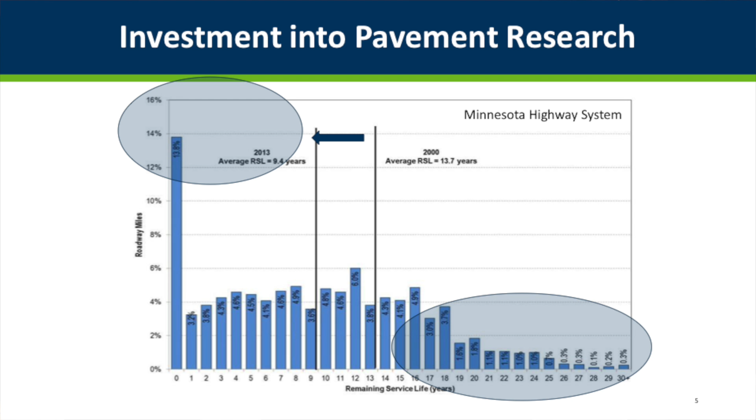But you can see how things changed over the years. We have different issues going on in our state. We fund different things. We may not maintain our roads. We may not, quote, paint the house as well as we should. But you can see in the 13 years since then, we've gone down to 9.4 years of remaining service life. So we've lost about 5 years, and we lost that tail at the end. We don't have as much of a balanced approach.

So when we start spending money on rehabilitation, we're not going to be able to put the money towards it because there's just not the funding to catch up. So it's very important, I think, the recycling we'll be talking about the next couple of days and the work we do at MnROAD, to look at rehabilitation and how we can do that the best we can.

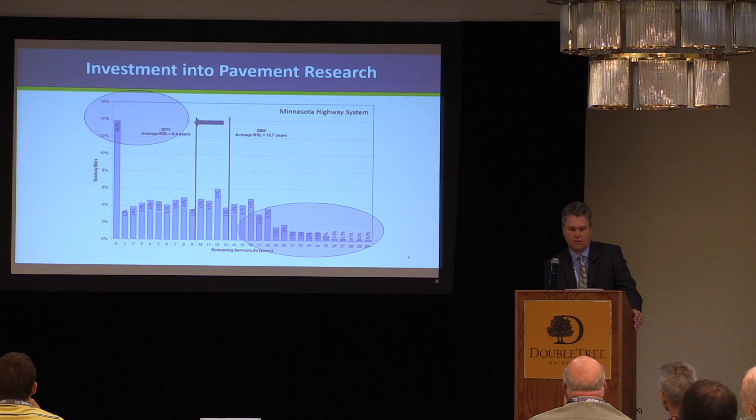A little background on MnROAD. Who has been out at MnROAD? Cool, there's not many people. So it'd be great to have you out there.

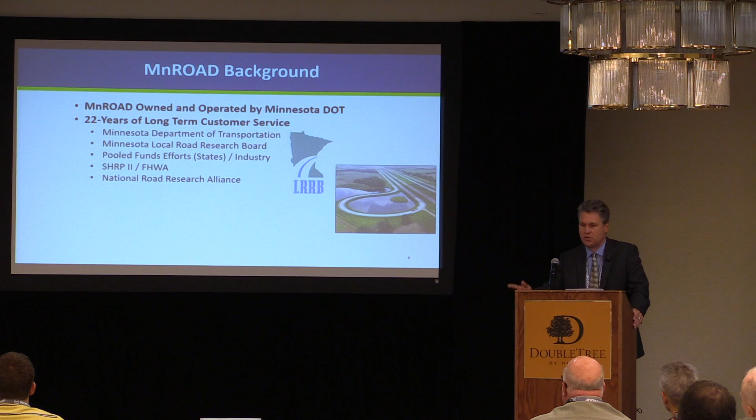We've been in operation for 22 years now. The Minnesota Department of Transportation leads the MnROAD facility. They've owned and operated it with their partners, the Local Road Research Board. Minnesota has a group that puts money towards research from the locals, the cities and counties. They get half of 1%, and they've been supporting MnROAD over the last 22 years. We also work with pooled funds with states. That's how we work with NCAT, SHRP2, FHWA. And right now we're working on the National Road Research Alliance.

We have both concrete and asphalt. We're in a cold environment and work with new and rehabilitated pavements. We've gone through 3 different phases. The initial experiments from 94 to 2006 did a lot of structural designs. We found that our concretes are thicker than they need to be, and that the environment causes more damage on our asphalt roads. Phase 2, we went through a number of different experiments and pooled fund studies for 10 years. And now we're heading into our 3rd phase that I'll be talking about later.

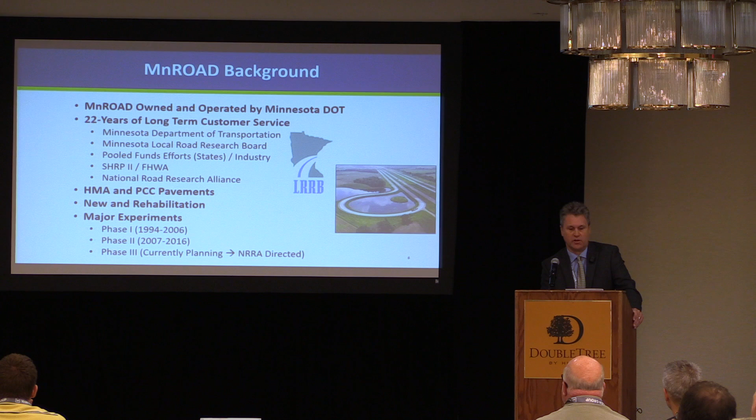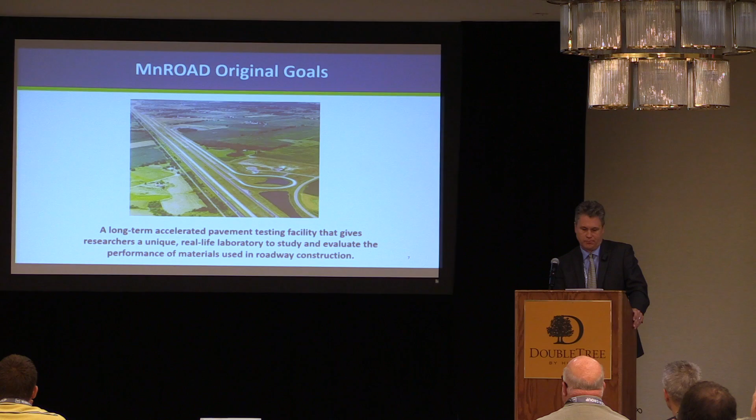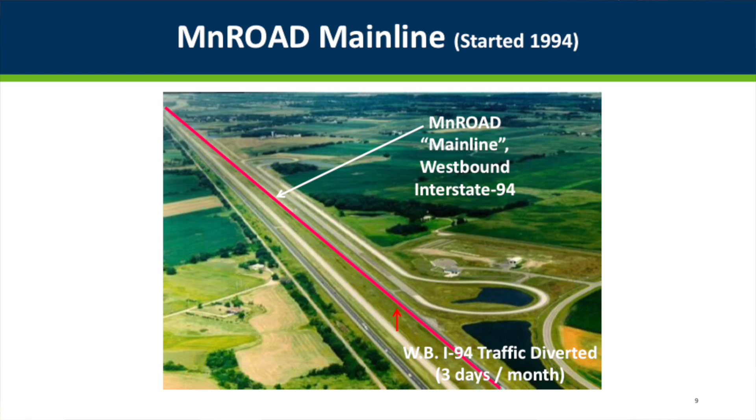For those not familiar with MnROAD, it's a test facility, a real-life experiment with real-life equipment, materials, and traffic. We have existing I-94, 2 lanes built in 1973. We built our main line next to that, where we divert traffic from the old westbound onto the I-94 main line. We move traffic off 3 days a month so we can go out and do monitoring. We can divert the traffic back and forth and have test sections on that main line.

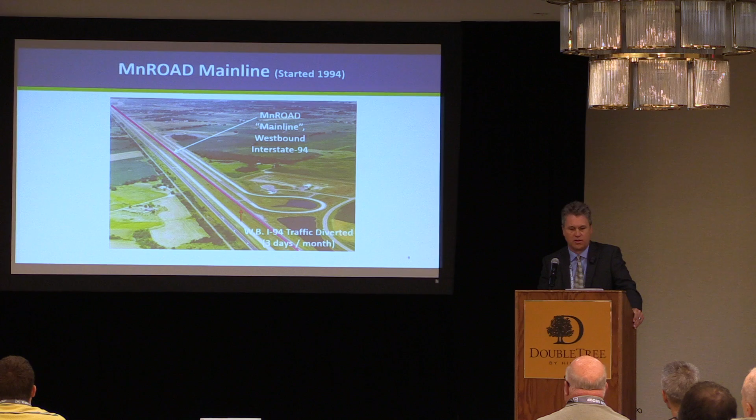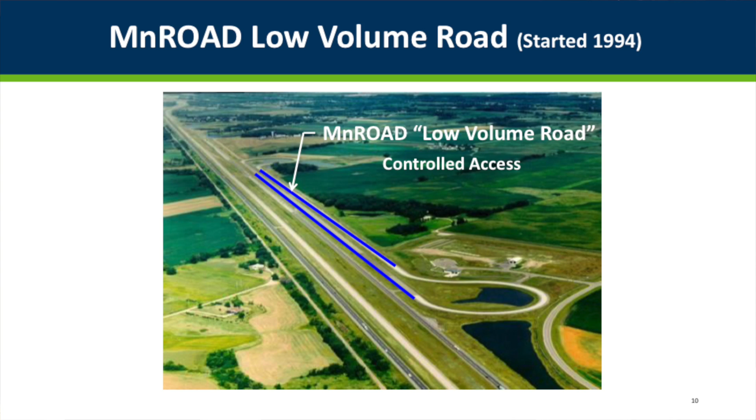We also have test sections on our old westbound. We have a low-volume road, brought to you by the Local Road Research Board. We do lots of national research even on our local system; a lot of the issues are the same. This is where we have controlled traffic, and we drive a truck around 60 laps a day on the inside lane, looking at the damage. It's to simulate a low-volume road, thinner designs, different conditions for the locals and their needs.

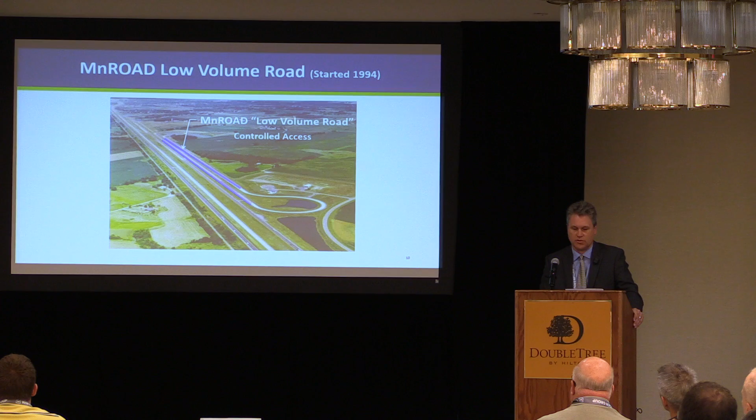And we're also building test sections. We started building test sections on the old westbound, the original westbound. We're doing some different things out there, and I'll talk about that a little bit later.

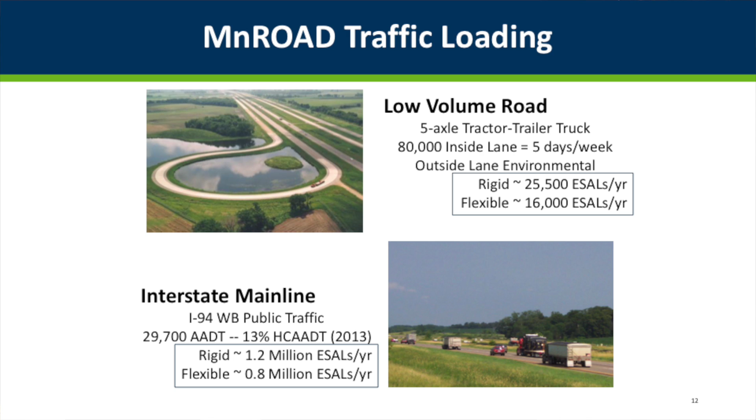So the traffic, again, looking at the low volume road, this is where I praise Doug, the truck driver. Doug drives around the track 60 laps a day. Doug says it's better than farming. Those who've heard me talk, I've said that joke too many times. But Doug drives around the circles. He provides the loadings. That's how we get our traffic.

And you see the ESALs there for rigid and flexible ESALs. The outside lane, again, is environmental, where we're not trafficking, looking at what the environment causes for damage versus truck and the environment. We also have the interstate main line. This is a very heavy trafficked road. Probably get about 13% trucks out there with a high ADT.

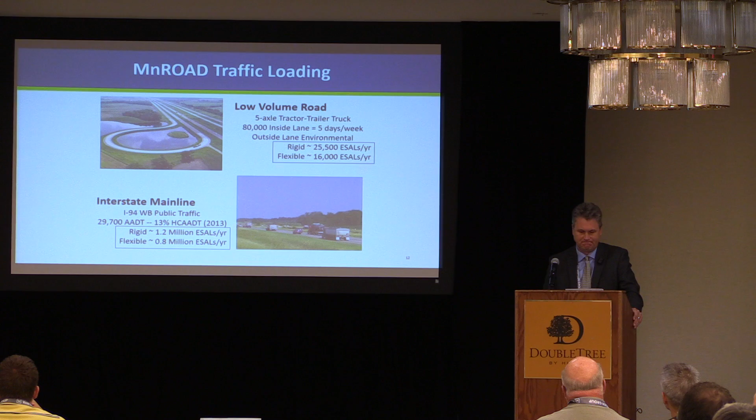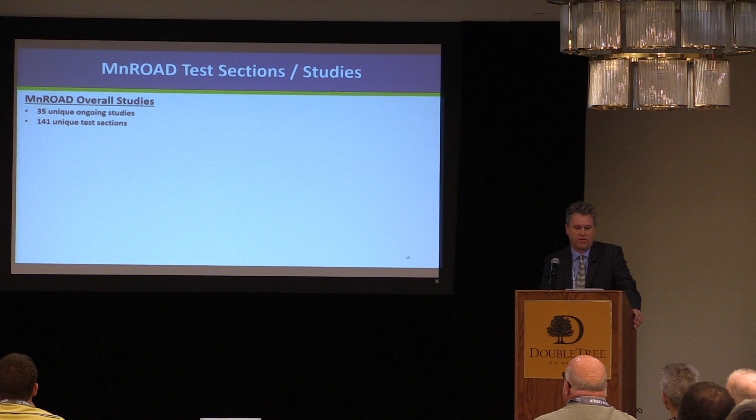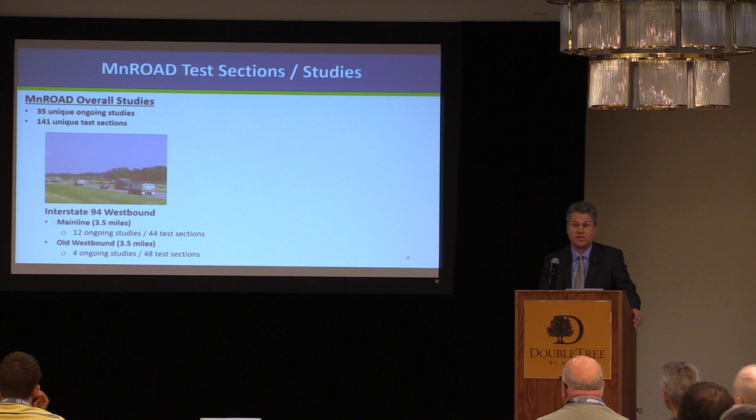So when you look at all the studies that are going on, it's quite a maze of studies, I guess. We have 35 unique ongoing studies out there right now. We have 141 unique test cells. Of that, the interstate, again, we have 12 ongoing studies out there, 44 test sections in our 3.5 miles. The old westbound 3.5 miles, we have 4 ongoing studies that we started up in 2010 and about 48 test sections. Then the low volume road itself, again, the Local Road Research Board sponsors that along with cities and counties, 19 studies and 49 test sections.

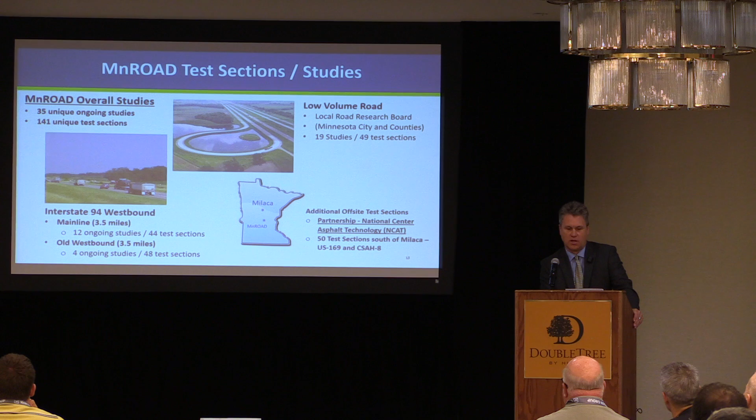So we've also added test sections off-site. This is with NCAT, and we'll be hearing more about that from Buzz and possibly Jerry later on today, but kind of the partnership with NCAT. We have test sections off the track, but now we have a pavement management van that we can collect data on and take care of the operations. So we can track the performance of those test sections. So we have a lot of different things going on, a lot of things to track, a lot of good things that we're doing with our group.

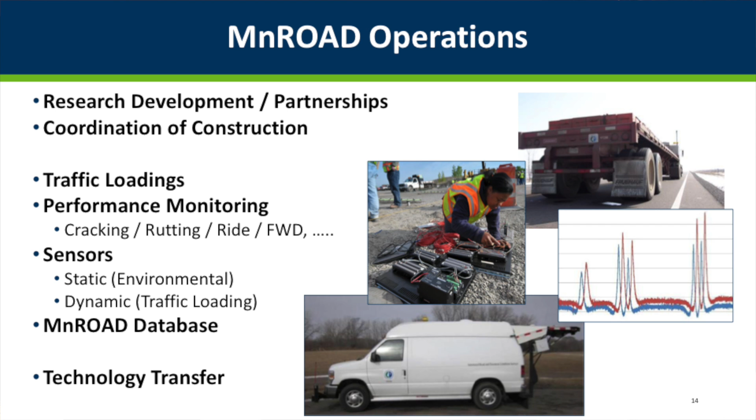Our operations, again, we work on the partnerships and the research development, working with people like you on what's the next study that's needed, coordination of construction. But we've also been monitoring the traffic, the loadings, the performance monitoring, cracking, rutting, ride. Sensors, we have environmental and dynamic sensors, and the database. And this all kind of goes into developing the background for each study and gives it the basis that it needs to be successful. We also do technology transfer and getting the word out.

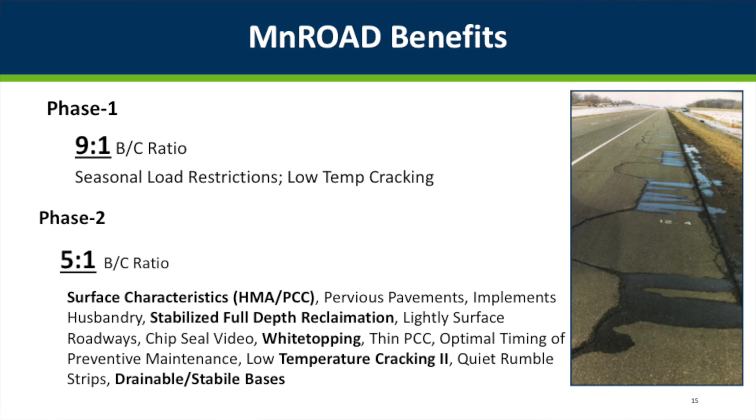Some of the benefits that we've seen over the years of the first phase, we had about a 9-to-1 benefit to cost. We have a paper out on this. We did a lot of different things on spring load restrictions, low temperature cracking, things like that. We also, in phase 2, in the last 10 years, saw a 5-to-1 ratio. Now, you can see all different studies there we've worked with, but there's a lot of benefits to doing things on a small scale before we build on a large scale throughout the state.

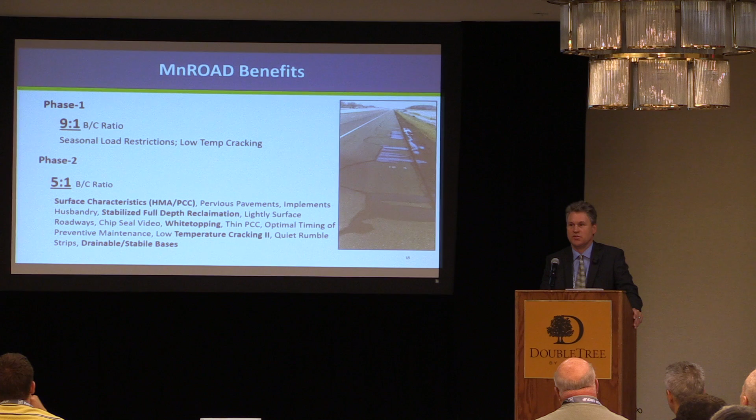MnROAD's been used for not only showing how something can work and building further beyond that, but also just the idea of building something that people see, kind of as a demonstration project that they then can build for themselves. For example, we had two types of concrete sections, not that you guys are big concrete fans, but the idea here is that we originally built 9.5-inch concrete and 7.5-inch concrete. They both perform the same. So building a 7.5-inch is working out just fine for us in reducing the thickness of our concrete. That kind of gave people confidence that yes, you can build something thinner, and yes, you can save money on materials and things like that.

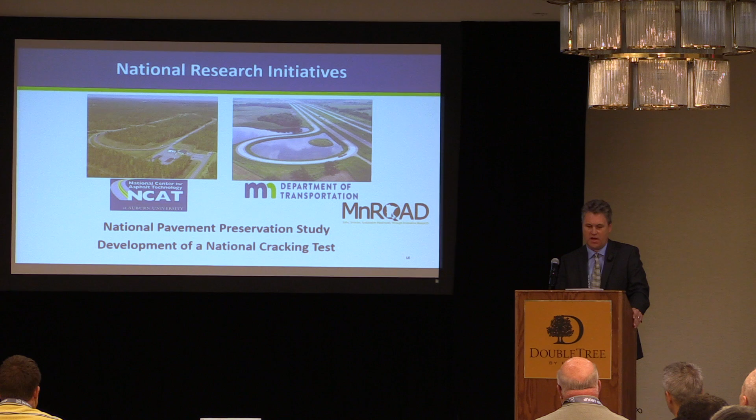Talking a little bit about our national research initiatives, we've been working with NCAT on 2 studies. One study had to do with pavement preservation. Another had to do with developing a national cracking test for HMA pavements. We got a number of different groups in this, states that are involved, industry that's involved. Through this partnership we developed the pavement preservation study, with NCAT being in the south, hot, warm, non-freeze, and MnROAD north, cold, freeze.

We had high and low volume test sections, but again, this partnership helped us develop national studies with climatic zones, having consistent ways of collecting data and producing results, and quantifying the life-extending benefits of pavement preservation. That's kind of the study that we're working on with the Milaca test sections, Lee Road test sections down in Alabama, along with US 280.

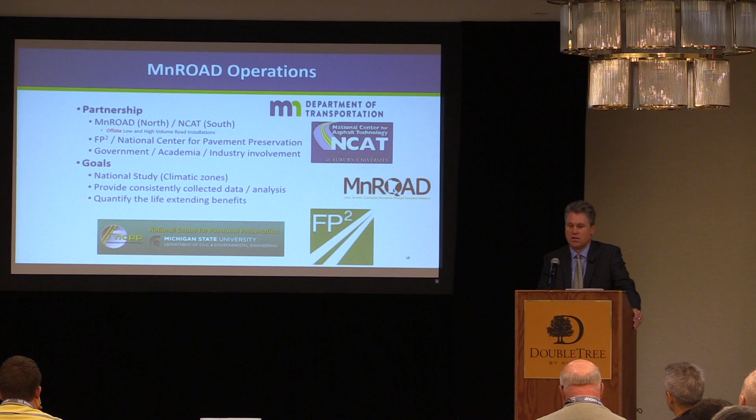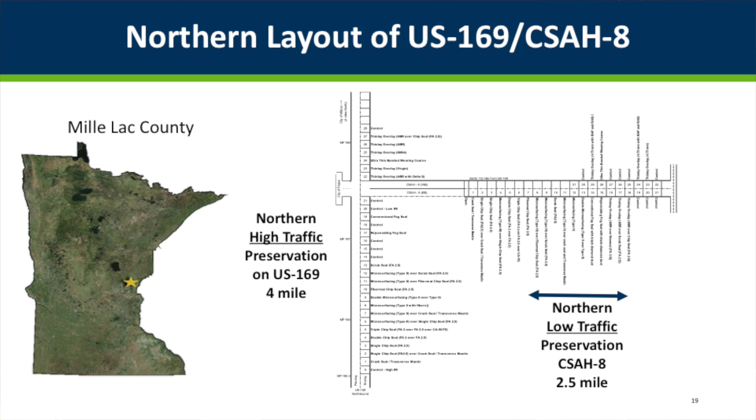So we've developed these test sections with the same contractor, building the same test sections. We have a number of test sections. This kind of shows a map of up near Milaca, which is about an hour north of here, looking at our high volume preservation: chip seals, cape seals, microsurfacing, thin overlays, different treatments. Same with the low volume road with CSAH 8.

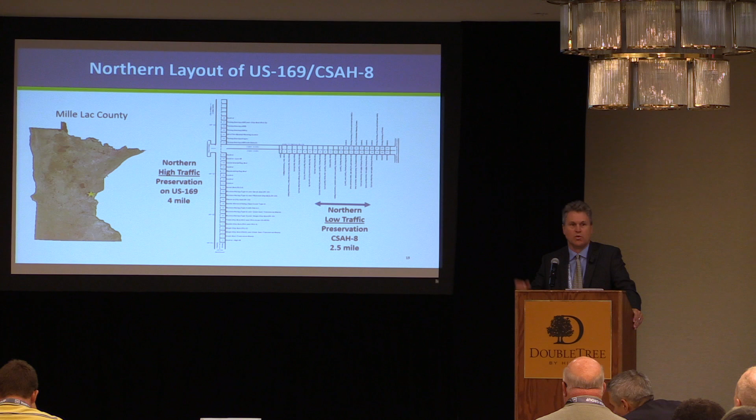The idea here is we built the same test sections on different volumes of roads. We built the same test sections down at NCAT. They built them a year before us, but the same contractor built them. So a lot of consistency here to come up with different studies that will not only help out Minnesota and Alabama, but will help out states in between. And that's how we're working towards the national goals.

And then we looked at performance tests. This is developing different criteria for mixes before you place them on the cracking potential of those mixes. You've heard about balanced mix designs and things like that. I think there's a talk later on today.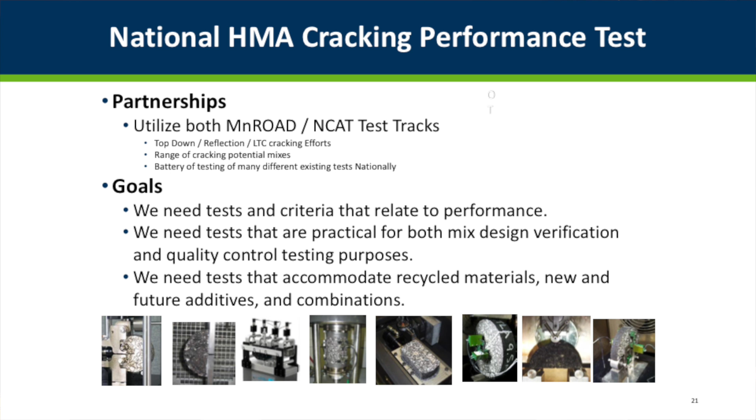But NCAT and MnROAD have been working with that on the HMA performance test, looking at the different tests utilizing the NCAT test track along with the MnROAD test track, and looking at all these different types of goals that we have for performance tests to come up with a test that nationally can be used to predict performance. And again, you need something that's going to correlate to performance. We built test sections related to that, do a number of different tests, and move forward with that.

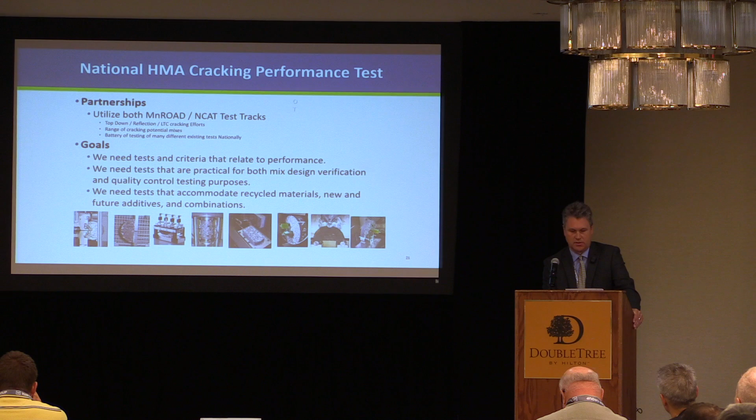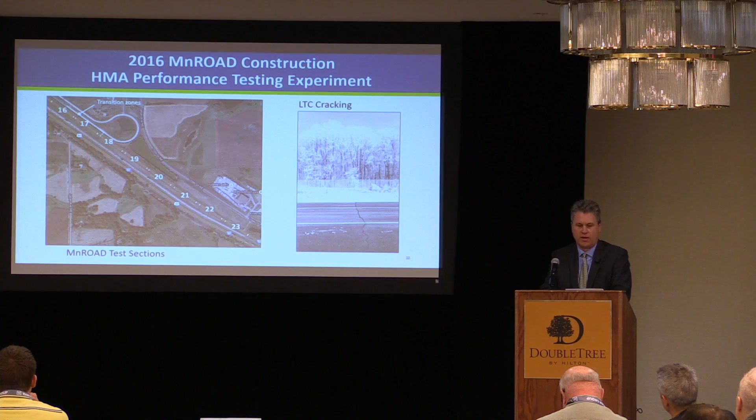Test sections we built at MnROAD, we built out on our main line. We built a number of those to look at low temperature cracking. And in 2016, we built test sections, which is kind of interesting: we built some that we hope fail and some that we hope have longevity to them. And the idea here is we use some stiff binders. You can see the different potentials that we have for cracking.

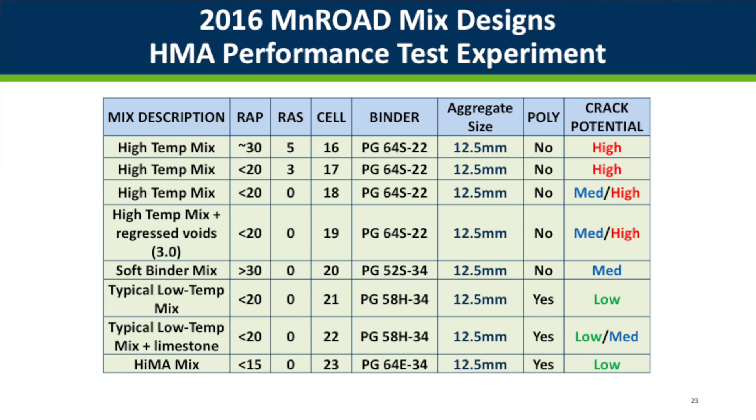But you can see that we use a -22 asphalt here in Minnesota, which is kind of silly because we get down to -40. So that should crack. That should show in our performance test that it'll crack. Then when you look at the ones with low potential, the idea of putting less RAP, different things like that in a mix with lower PG graded asphalt, those shouldn't crack as much. So we're hoping that we built these test sections that we can run the materials through, predict performance, and then see the observations later on. And the same thing they're doing down at NCAT, but they're looking at top-down cracking instead of low-temperature cracking.

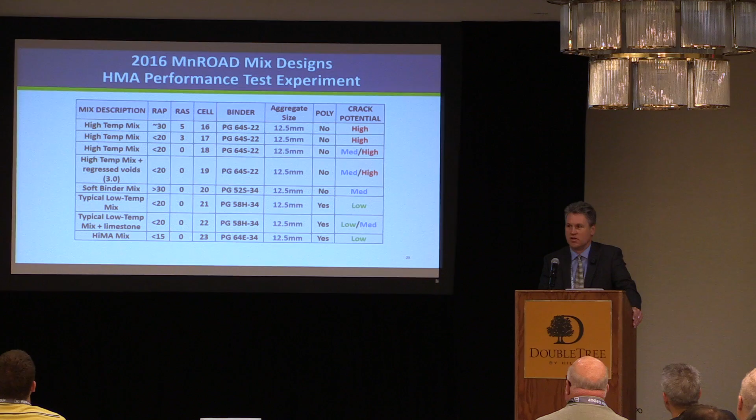Other things going on here in Minnesota is we have a group called the National Road Research Alliance, and this is something relatively new in the last couple of years. It's a pooled fund study. This is our attempt to share the test facility with other states and other industry and academia and associations. We started in 2016. Again, we're trying to look at national and regional issues, not just local issues. We want to foster innovation with states, academia, and industry, and best utilize the MnROAD test track the best we can.

We put $3 million of MnDOT construction money into this, but we also have about a $3 million pooled fund study with 6 states and upwards of 40 academia and associate members a part of this. Again, we're trying to develop innovation, focus on implementation, technology transfer, and training. I think we've done a lot of research in the country overall in the last number of years. We're trying to get that information out to people and utilize it for its benefits. That's what we're looking for with NRRA.

So some of the agency members, the Local Road Research Board, Caltrans, Illinois, Michigan, Wisconsin, and Missouri are part of the pooled fund study right now. But these pooled fund studies, along with the NCAT pooled fund studies, we're always looking for more members to join in. Sometimes people say joining the NRRA is about $150,000 a year for each state. And that's a lot of money. Some states say they're a small state and they can't afford that. But when you look at having 10 other states put in that money, you got about a 10-to-1 benefit cost right there at the start. So I think it's quite a deal to join.

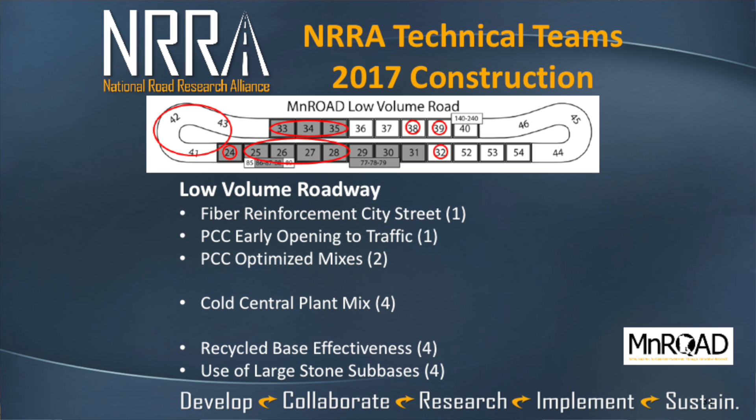The low volume road is where we're going to tour tomorrow, and I think we're going to actually walk most of the loop. We're going to have a beautiful day to get out there and look around, and we're really excited to have you all out there and see the facility. We've done some new sections. We also have some maps showing all the old sections and studies that are going on. Again, we talked about doing fiber reinforced city streets. Can you build a 3-inch concrete? You might say maybe we can't after seeing the cracks in it.

You're going to see some things related to early opening. We had the whole question about can you drive trucks on concrete right away, or what happens when you do. We actually put 1.5 inch ruts in some concrete, seeing what damage that has over time, and loaded different sections, looking at maturity and things like that. We also looked at optimizing mixes. How much cement do you actually need to put in concrete mixes?

We did some stuff with cold central plant recycling. We have sections looking at using RAP in a cold central plant mix with emulsion or with foam, with chip seals or thin overlays on top of those. Recycled bases, crushed concrete, different types of recycling in the bases, what effect that has, what seasonal characteristics those have over time, and use of large stone sub-bases. All these studies relate to the NRRA priorities that were set by both the states and the different associate members. So you see a few sections like that.

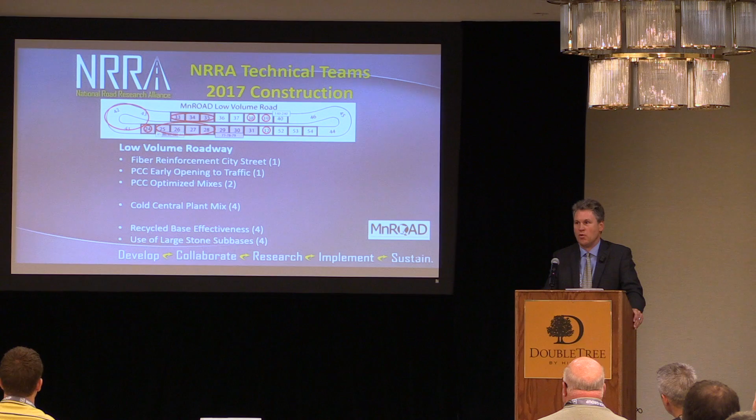Jerry's going to talk about a few other examples of MnROAD. He's going to get more into the recycling side of it. But we've done some really good work related to full depth recycling, FDR, with emulsion and things like that. We've had really good performance on those. Jerry will be talking about cells 2, 3, and 4 on our main line. Those cells have 3 inches of asphalt with the stabilized materials underneath. Not many people thought they would last, but we have very few cracks, very few ruts after 10 years. They've outperformed our expectations. So hats off to your industry on promoting that technology for owners of different roadways.

So leaving you with how to get involved. Again, we do Research Pays Off webinars. We're in the process of doing one right now. It is the 3rd Tuesday of the month, 10 to 11 each time. Please, you can get into that and view that. That's something you can do at your desk, at your office. We started that a few years ago, and that seems to be very successful.

NRRA, getting involved with NRRA membership. Again, we have conferences in the spring. We had ARRA here last year. In the spring we did some workshops with ARRA, and that worked out well. Getting involved would be great with the research partnership, along with NCAT and different things like that. I think being part of NRRA would be helpful for you guys too, because we've been talking about doing different types of things like we've done at MnROAD on other test sections that we could do throughout the state with recycling as the basis.